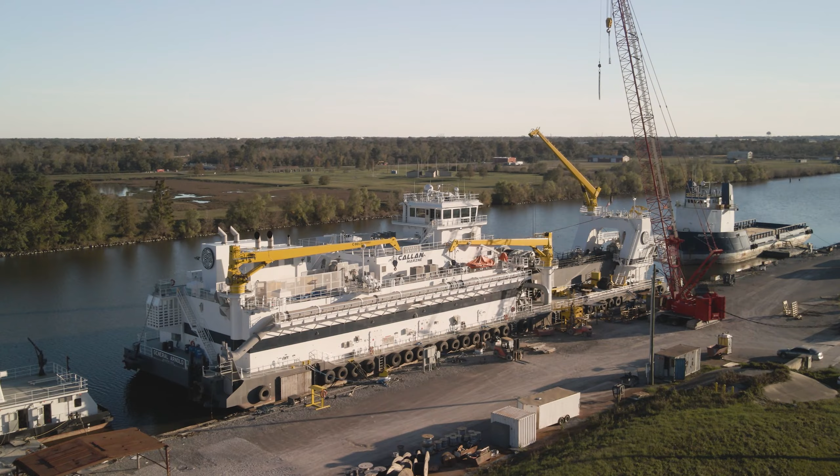With C&C Marine, we're a family-owned and operated business located in Belle Chasse, Louisiana. If it's built out of steel, we can do it, and we take on a variety of different marine projects. We focus primarily on new construction, and then we do barge repair as well.

Anthony Siblich, who started C&C Marine about 27 years ago, doesn't look at things the same way that maybe somebody else had always looked at. What he really focuses on is efficiency, and part of efficiency is being innovative.

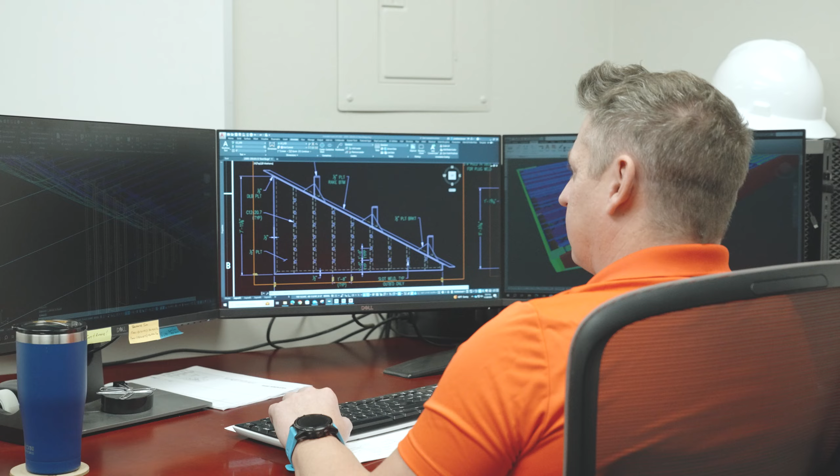I've been here 12 years, and they adopted ShipConstructor here just before I got here, so almost 13 years now. ShipConstructor is always innovating, so we're always seeing what the innovations are, what the new process improvements are. A handful of years ago, we started looking at how to improve some of our efficiencies here with reporting systems, and one of the ways we discovered was some automation as far as reporting, and we used that through Enterprise Platform.

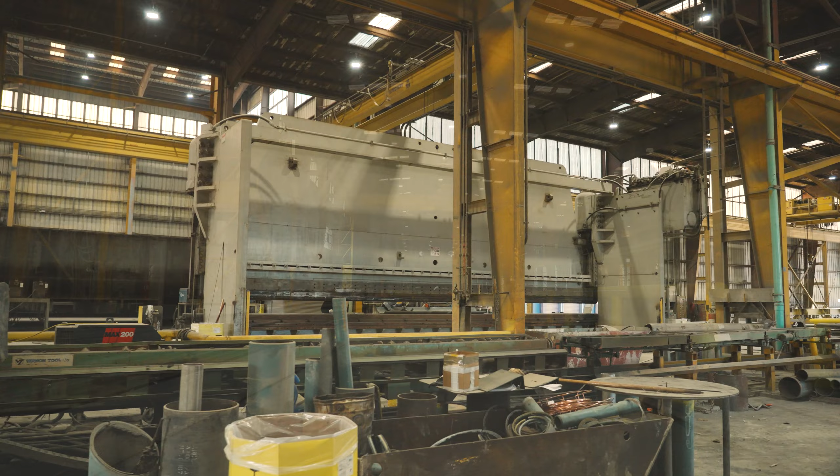I started working here 5 years ago. I didn't know anything else but C&C - it's my first job, I came straight out of college. For me, this is what I thought was typical. Then throughout my years, I started visiting other shipyards for various reasons, and I realized the overhead cranes, the panel line, assembly packages - everything is just astronomical compared to everyone else.

We have a growth mindset here, and we're constantly growing and improving our people, processes and systems to be more efficient and more cost-effective for our customer, and to produce an overall better product along the way.

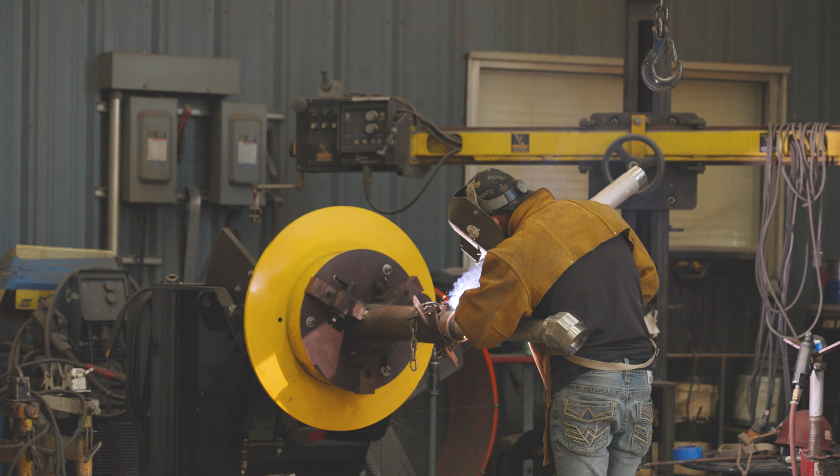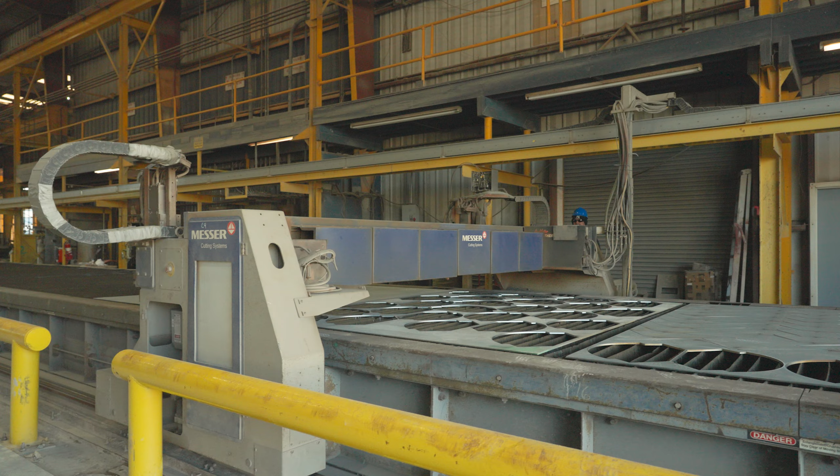If we can save man hours by adding some kind of automation, we do that - it makes us more efficient. If we can add a better quality product by adding some automation as far as welding goes, we do that. If we can save time by adding new technologies and automation, we do that. Our attitude is, what's the best way to deliver the product to the customer, and how do we get there?

We used to take a report for, let's say, a structural cut list, and go through multiple steps to produce it, and it was a 45-minute process per unit to do. Now I can do it in 2 minutes. We pride ourselves on the quality we do here - you can still do a quality job, but you can also be efficient.

We're not married to one particular process - we're willing to adapt and adjust accordingly. Using ShipConstructor and Navisworks to do all our reviews just makes it a lot better product, and you're not doing as much field fitting because you already handled all that in the model itself.

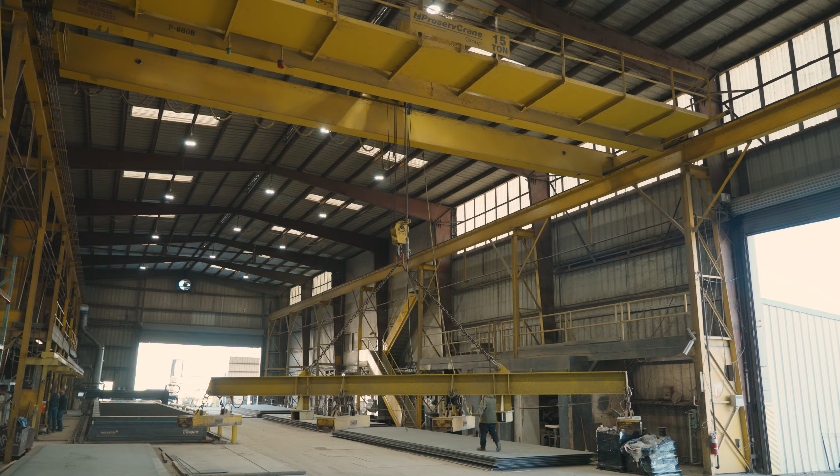We always want to try to get faster - that's always the key. So any kind of way we can speed the job up, whatever technology does to speed it up, that's what we're looking to do.

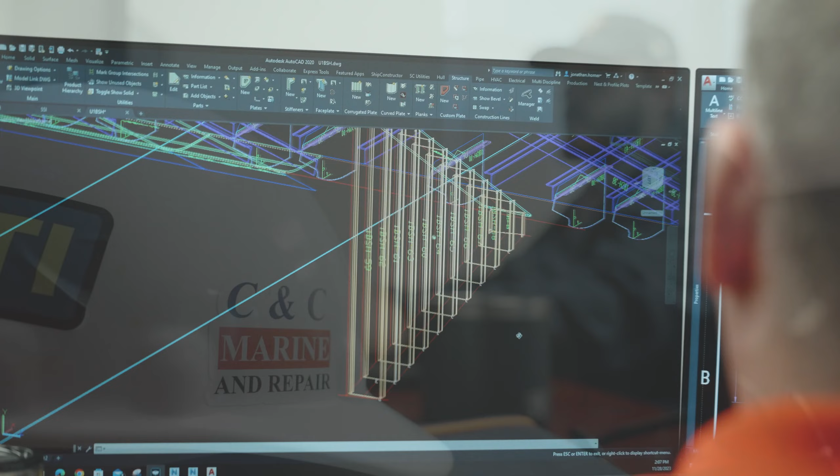It starts with modeling, and how we model the vessels themselves, and understanding that doing repairs or doing modifications in the field is not efficient. It's really easy to make a modification in a model. It's a seamless integration that ultimately allows us to provide a better product that is done in a faster time with fewer mistakes.

The crew gets used to what they're doing. It's like a puzzle. They just get very good at what they do.

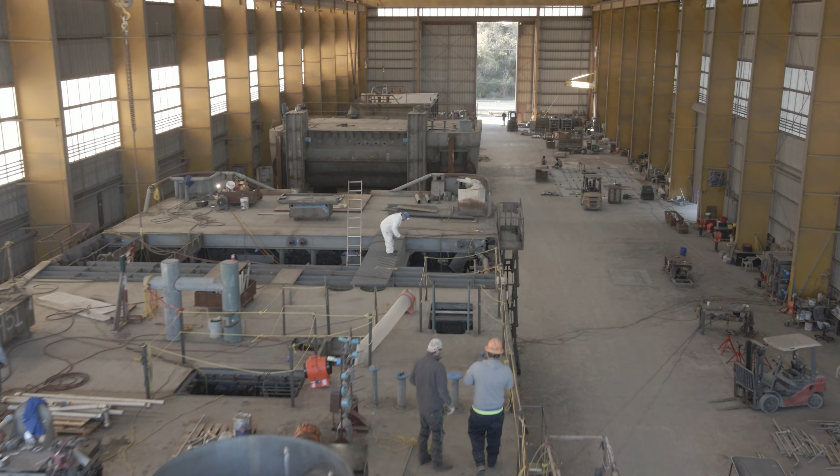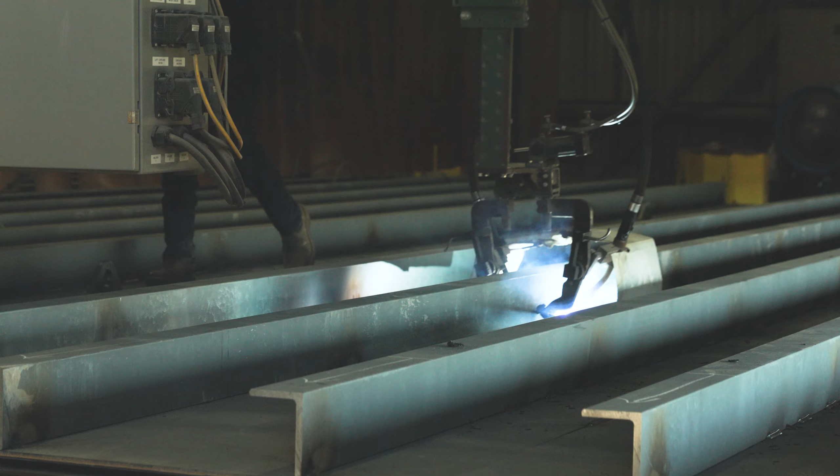Spit them out fast. For us, using ShipConstructor is a critical component to the integration process. The 3D model is essential for our production.

First, it goes through the assembly line of the panel line, NC cut on the laser table, and all these lines are pre-cut for us based on the packages produced from the 3D model.

All we're pretty much doing is taking that package and using this machine to lay out everything in a more efficient manner. So we use our product model in multiple ways. First of all, it's our main tool for engineering and design. What we do is we create the vessel in 3D, and then we use that for verification as far as creating the QC portion of it.

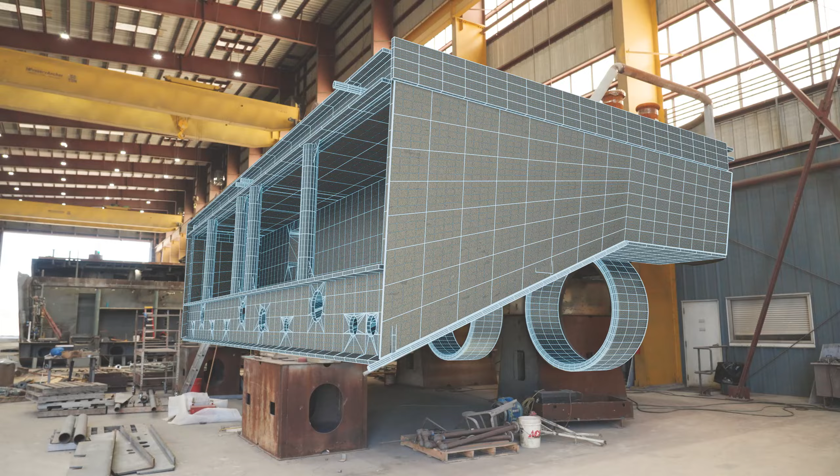We then take that model, turn it into our production package. Our production packages are then used to fabricate the vessel, engineering our lifts, and we also use it to hand over to our customers to say, look, this is the final product of what was built.

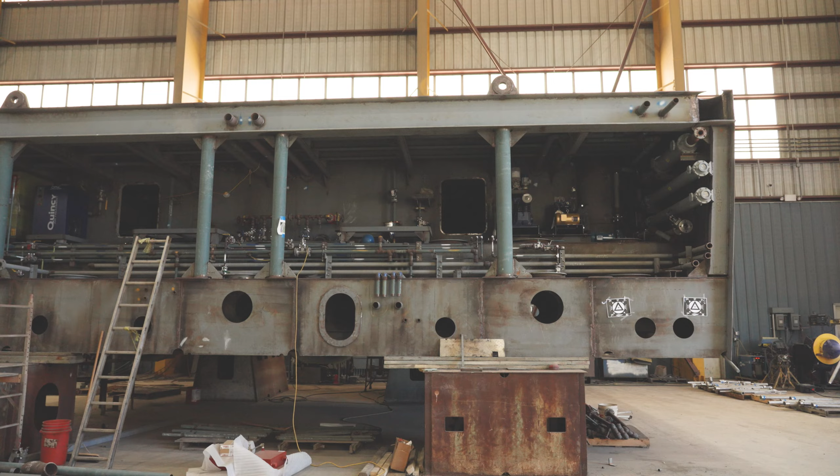We get 95% of our modeling done before we even start building. And what that does is it eliminates us having to correct mistakes in the field. If we can correct it in the model, it's going to help us out because the errors start to

compound when you're out in the field because of the amount of personnel involved. But if we correct it, you have one person correcting it with a mouse as opposed to 4 people correcting something with a torch and a welding lead.

Our leadership has never had a problem with making investments in the shipyard as long as there's going to be return on that investment. So that's the balancing act always.

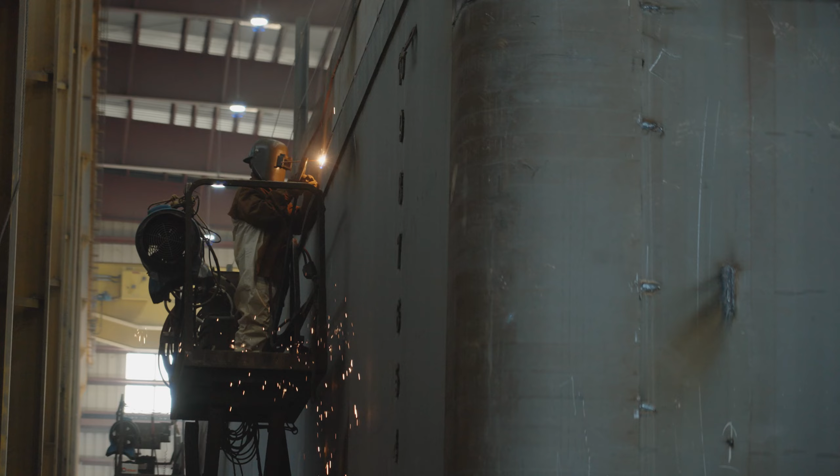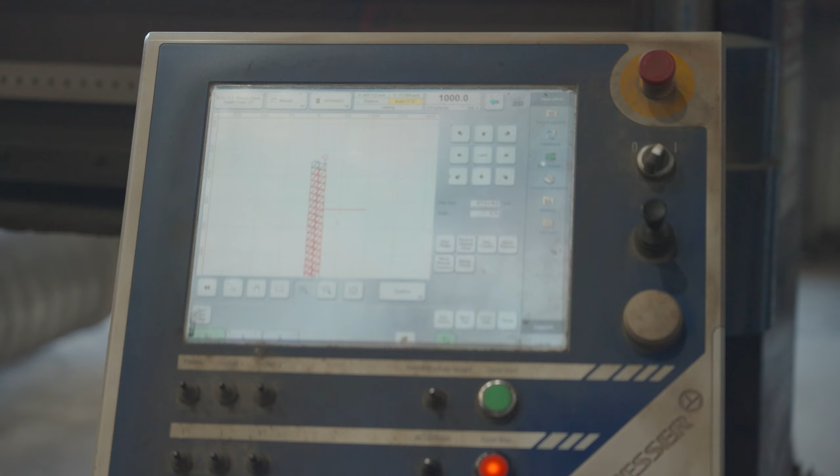In order to improve upon our processes, we're actually doing some more investing in automation here. We just improved our dart welders, our seam welders to be digital, to where we have more manipulation and troubleshooting, digitally. We're actually getting ready to install a robotic panel line tool to where we take and place angles on our plate or our panel line robotically, and we can increase efficiency by like 60%.

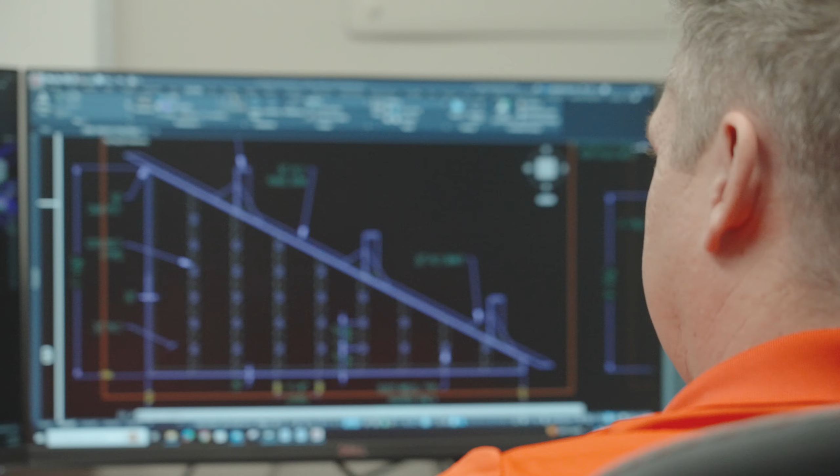Partnering with ShipConstructor has proven in 12 years very valuable, whether it be learning how to create a more efficient report, output robotic information that we can put on our robotic welding, the innovations as far as being able to model quicker by having different standards of operation that ShipConstructor has available to us. We just, they've been a valuable partner.

They always say a house is only as good as its foundation. In a lot of ways, our projects are only as good as the engineering behind them. For ShipConstructor, that's really a key component to that.

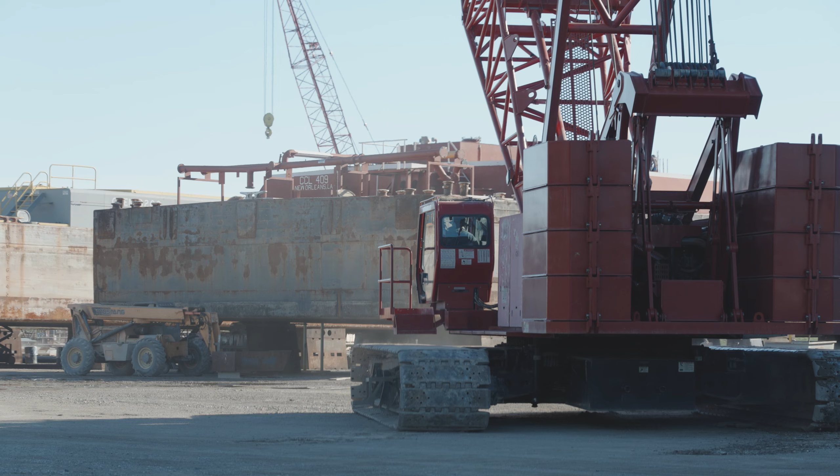We don't cut any steel, we don't do any production until the model is finished. And once the model's done, then we feel safe that we can actually start cutting steel and building the vessel. And we know when we go to build it, it's going to be that much faster because we've made it really simple for the guys in the yard to understand what they're supposed to do.

And they get to focus on just what they need to do and not worry about all the other noise that might be going on. And that really starts with ShipConstructor and SSI.